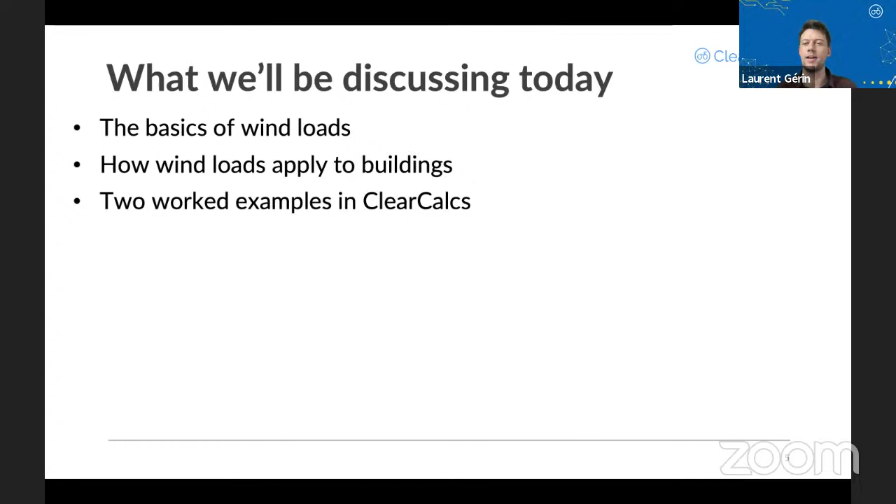And then the biggest thing, obviously, with wind load is wind speed. You just have to go outside during a storm to know that the faster the wind, the stronger it's going to feel, and buildings feel the same thing. But there are a few other things that we need to consider when we're talking about wind loads, so we're going to be talking about those today.

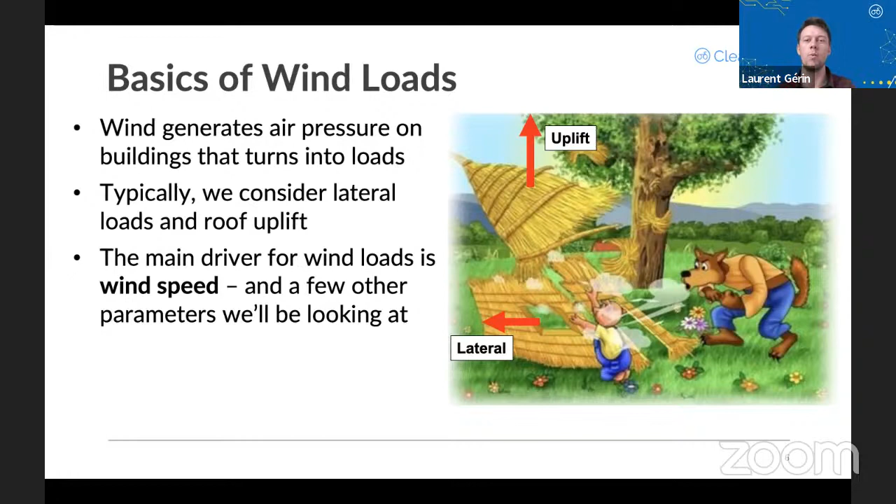So we are talking about wind in the United States. ASCE 7 is the law of the land here almost everywhere. If you're working with another wind code in your jurisdiction, we'd love to hear about it. But as far as I know, mostly everywhere is ASCE 7. That's where you'll find your formulas, your design values for your wind speed, things like that. So definitely a must-have when you're designing for wind. One thing to keep in mind is your local jurisdiction or your state building code might make some amendments to it. Most common one, especially in bigger counties, the county might set a specific design wind speed that overrides the ASCE 7 maps. So definitely double check that when you're working with wind loads.

Right now, ASCE 7-16 is what's used in most states. That's what's referenced by the International Building Code 2018 and 2021. International Building Code 2024 will be switching to the 2022 version of ASCE, the latest version. And I recently learned the Florida Building Code coming out at the end of this year will also be using ASCE 7-22. And there are still a few states using the 7-10 version, which is a bit older. I believe there's Indiana, Iowa, and a few other states. So if you're working in that state, you're probably aware of this, but good to keep an eye out for these things.

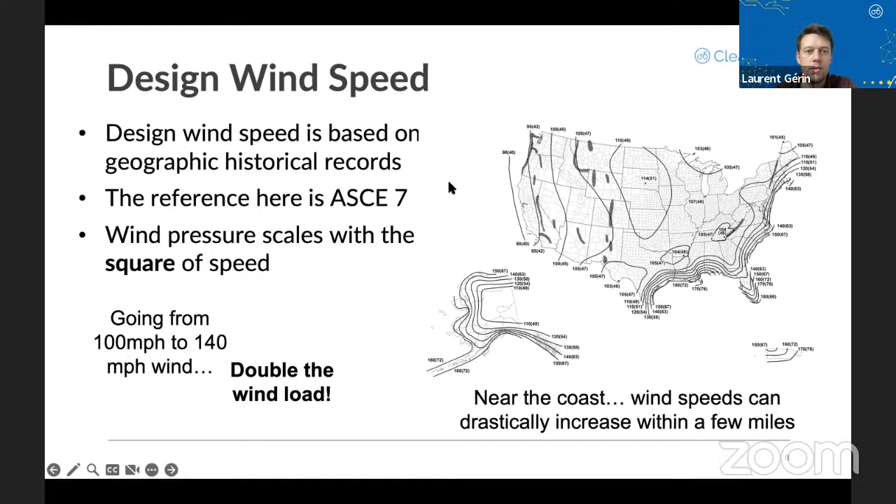So it's pretty significant. And especially if you're near the coast, say the Gulf Coast, the East Coast, even within a few miles, you might get a 10, 20, 30% difference in wind speed. So again, this is one where you might want to check with your local jurisdiction to see what wind speed, if any, they specify. Otherwise, probably better to err on the side of caution because, as I said, the gradient on wind speed here is so high. You really want to make sure you're using the right wind speed. It's got a huge impact on your design loads.

Next, we've got exposure categories. And so this might be something that you feel if you're, say, going hiking and you're in a clear area where there's no trees and it's windy, you feel it, and then you get in the forest and all of a sudden it's calmed down a lot, there's a lot less wind. That is basically this exposure category. So there's 3 categories in ASCE 7. It starts at B, ends at D. There used to be an exposure A, but that is no longer in the standard.

But exposure B is basically anything urban, suburban, where you've got trees, you've got buildings that kind of shield the wind. Exposure C is anything on land that's a field. Maybe you've got a couple trees here and there, but overall the wind is unimpeded. Again, this is kind of like the transition where you're walking in the forest. Exposure B, you're walking in the forest, not feeling any wind. Exposure C, you're out of the forest. You can still see it, but you're feeling a lot more wind. And then exposure D is generally anything where you're near a big body of water. So the Great Lakes, the oceans, something like that is where you'd be looking at exposure D.

And in general, for residential design, you're going to be looking at the worst case exposure. So you might be building at the edge of a new development where on one side you've got exposure B and on the other side you've got exposure C. You would, in general, just pick exposure C for everything. And that's the conservative option. Now, if for some reason you were finding that these loads are inappropriate or far too high, you might be able to adapt these exposure categories. And the standard does have some instructions on this. But we're not going to jump into that. Almost all the time in residential building, you're going to want to look at just the worst case scenario for exposure.

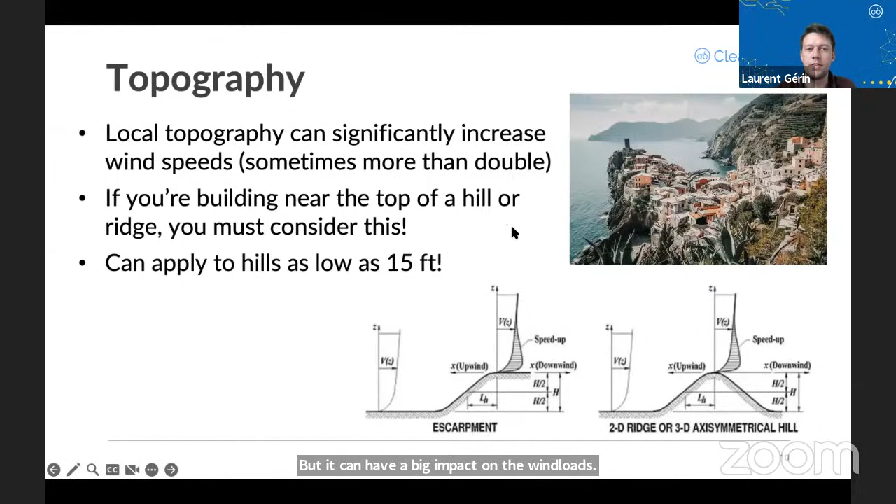And what's interesting is if you look in the standard, this can actually apply for hills that might be as low as 15 feet. So really small hills might actually have a pretty significant impact on your wind loads. And that can actually easily double your wind loads sometimes. So significant increase in your wind loads. Very easy to miss because, to be honest, the calculations are not that straightforward, but it can have a big impact on the wind loads. So I'd love to hear if this is something that you typically calculate based on your geography or your project.

Another one is elevation. So obviously, as you've probably felt if you've been in an airplane, as you increase your elevation, the air gets thinner, there's less air molecules in the air. And so the air density actually gets lower, and that means lighter wind loads. There's less air molecules hitting your building, basically.

And just for fun, I looked. So if you're in Colorado Springs, which is where Connor, my colleague here, lives, and you've probably spoken with him, you'd actually get about a 20% reduction on the wind loads compared to doing the same building at sea level. So it's a pretty significant reduction, and 20% might mean you get to go to a slightly smaller sheathing size or something like that. So something to consider. And what's cool is in ClearCalcs, if you enter your project address, we'll automatically calculate the ground elevation for you, and we'll calculate that factor for you.

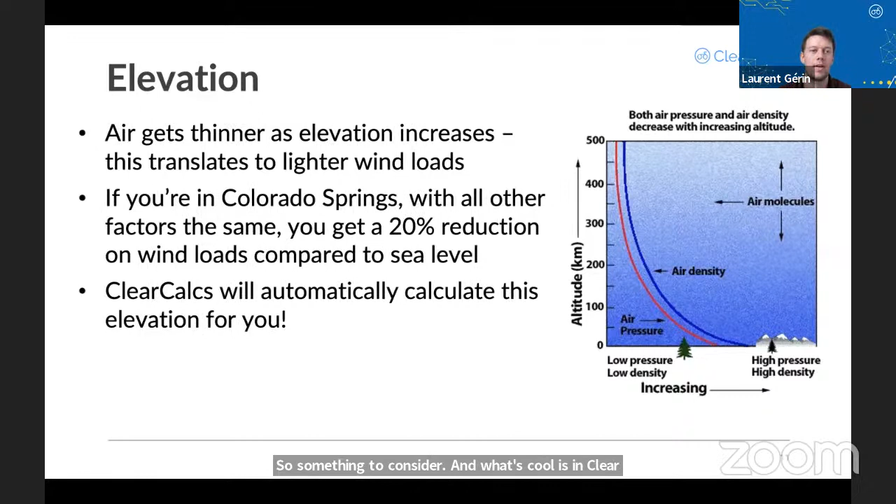On the inside is where things get a little bit more tricky. The standard kind of simplifies this a little bit, and they give us 4 different categories of buildings. So the first one is the enclosed building, and that's pretty straightforward. We're saying there's basically no major openings, and if there are openings, we are completely sure that they'll be closed and unbroken during a storm. So especially if you're near the coast, you might have some protected openings, or they might be missile resistant or something like that. So that's something that you would consider in an enclosed building.

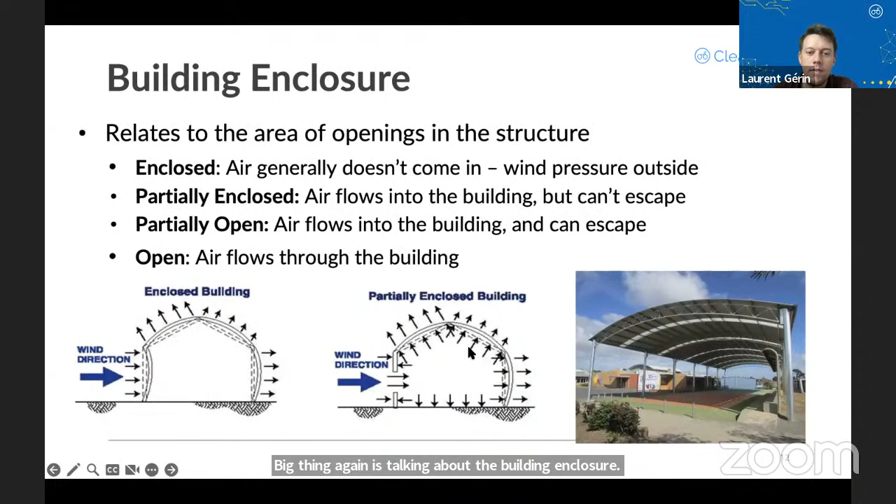If we're thinking about pressure on the inside of a building, this also has an impact with the components and cladding. If you think about your studs in a tall wall, obviously if your building is trying to blow up like a balloon, and you've also got the wind causing suction on the outside, those two things are going to add up, and it makes your stud bend even more. An important thing here is that the components and cladding loads get much lower as your tributary area increases.

So what does that mean? Basically, we talked about turbulence and how it's very local effects. If we compare, say, a single shingle, the turbulence only needs to happen over that single shingle for it to fly off. Versus if you're thinking about an entire rafter, you would need a lot more turbulence, a worst case scenario over that entire length of that rafter, all happening at the same time. So basically you average out this turbulence over the entire area of the rafter, and it ends up being a much lower value than if you're only looking at a specific shingle.

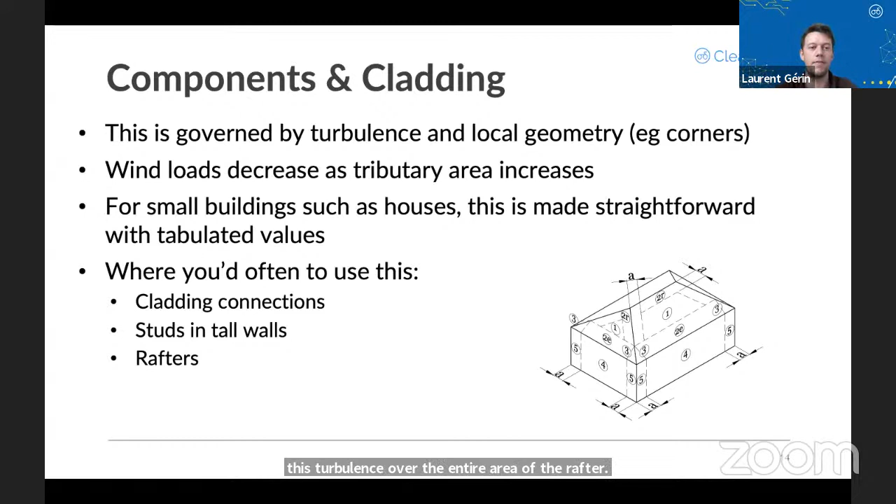And then the other type of wind load that we spoke about was main wind force resisting system loads, or as we tend to call it here at ClearCalcs, the MWFRS loads, not a type of dinosaur. These loads are typically applied over the entire area of the building. So this is where you're thinking about, is my building going to overturn? Is my building going to shear? Or are my foundations going to slide? So in this case, we don't care about the local turbulence much. We don't care about that single shingle flying off. We care about the entire building standing up in a big storm.

I'm sure you've seen some pictures of the skyscrapers in New York where they've got the crazy dampers for vibrations. That's where you'd be thinking about the main wind force loads. And these ones would be a lot more complicated. You're thinking about the vibration in the building, natural frequencies. Luckily, if we're dealing with low buildings such as residential housing, and if they're rigid enough, which the standard gives a definition for, but most houses would meet, things are a lot simpler. We basically just get a factor of 0.85 we apply to our wind loads, and that's it. We've accounted for the vibrations in there.

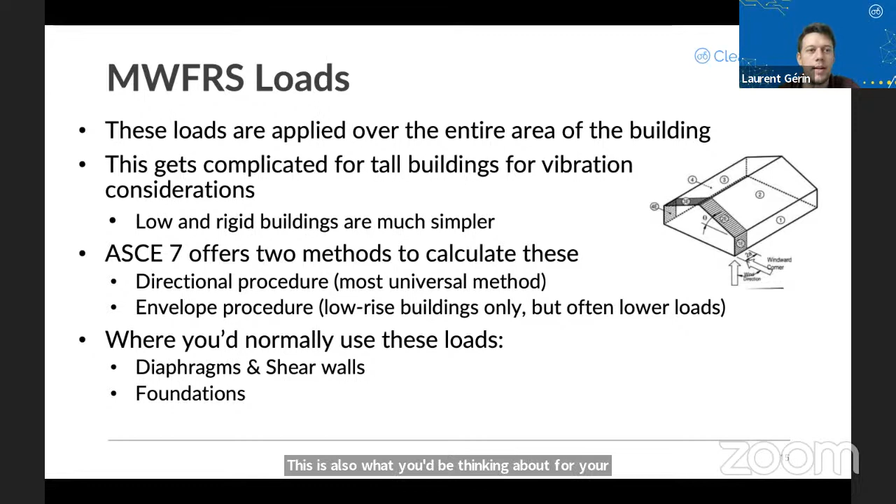And one important distinction here, and we've heard that question before, so I wanted to make sure to speak about it here. Wind loads in ASCE 7 are calculated at the LRFD level, so the load resistance factor design. If you're working in ASD, which is typically what we'll be doing in residential design, these loads are multiplied by 0.6. What's really important here when you're working, say, in ClearCalcs, and I believe most other software, you will actually enter the wind loads at the LRFD level.

So you want to be very careful about that. Obviously, if you're multiplying your loads by 0.6 before you put them in ClearCalcs, they're going to get multiplied by 0.6 again. So you'll be drastically underestimating your wind load. So definitely something that you want to be mindful of.

Okay, so now we are going to look at a design example in ClearCalcs. We're going to focus a lot more, obviously, on calculating the wind loads, but figured it's nice to see it in application. And so what we're going to be doing is design a stud wall spanning 2 floors. I put an example picture here. And we'll be designing this in Lincoln, Nebraska. It's a gable roof, and we've got different design parameters here. And so I'm going to switch into ClearCalcs now, and we're going to look at designing this.

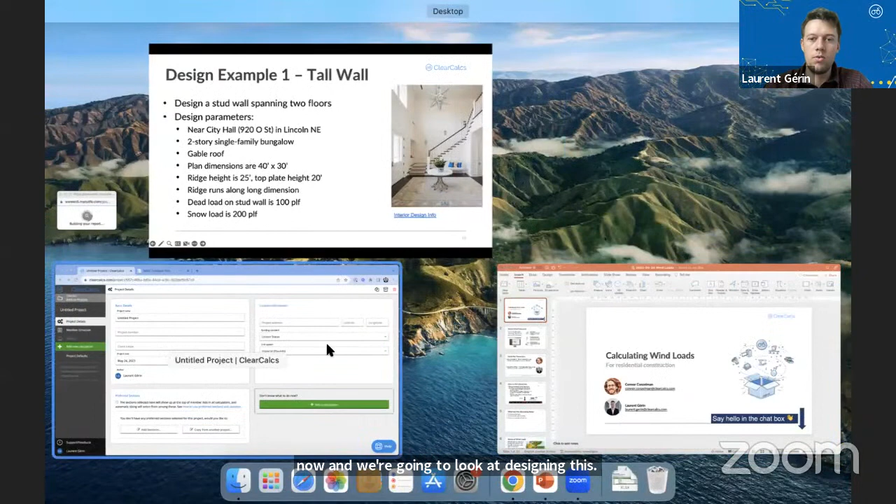And what I'll do actually is I'll do this. If I go to ClearCalcs, can you see my ClearCalcs? Yep, we gotcha. Awesome, great.

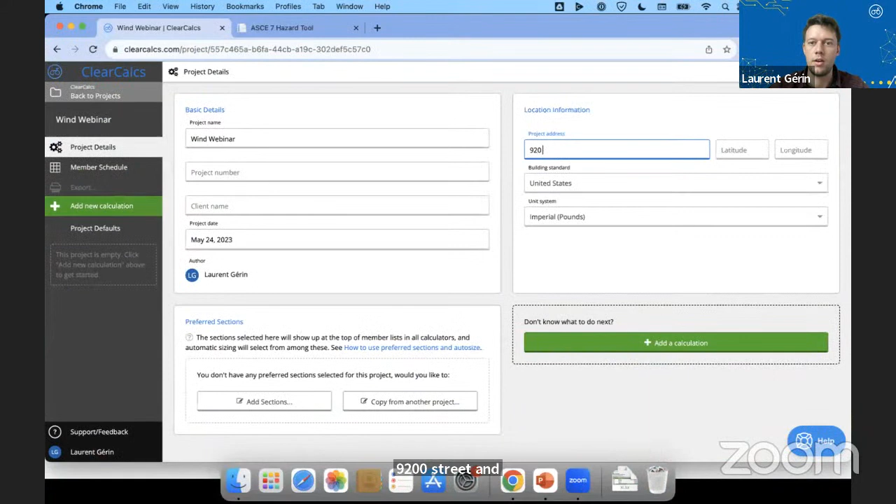So I'm just gonna say wind webinar and project address. I apologize, I should have copied it. If I go back to the presentation, here we'll see it's 920 O Street in Lincoln, Nebraska, near City Hall. So I can come back here, 920 O Street, Lincoln, Nebraska. And I can see here I'm in Lincoln, and I've got my little satellite picture. And already I'm looking at this, and I can start thinking about, ooh, what exposure category is this going to be? This looks pretty urban.

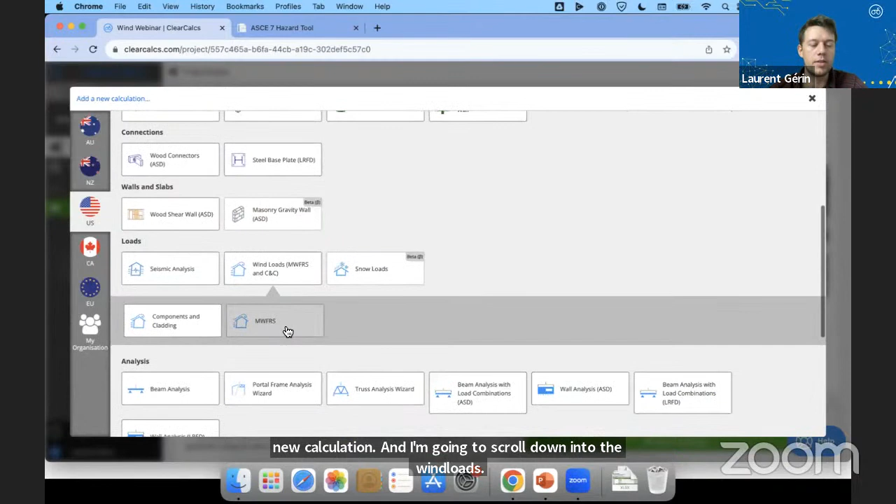So I'm going to create now a new calculation, and I'm going to scroll down into the wind loads calculator. And let's start with the components and cladding. We discussed that if we're doing a stud wall, we're looking at the individual stud as a component. We want to make sure it's strong enough. So we'll typically be dealing with components and cladding loads. So I'm going to create this calculation here. And first thing I see, type of calculation, components and cladding. So we're good. First question, basic wind speed.

So this is something that we're working on soon. Ideally, we'll be able to just calculate this for you. You'll just put in your address, we'll put it there. But it's not quite something we've got right now. So in the meantime, what we recommend is this ASCE 7 hazard tool. And you can visit it at asce7hazardtool.online. And it's basically got a map of the United States with different wind speeds. This is basically the same map that's in ASCE 7, except in a digital format.

So I already entered this, but say we want to enter it again, Lincoln, Nebraska, I'm going to pick ASCE 7-16. See, there's also the 2010 and 2022 editions, but we'll keep it to 16. Risk category: this is typically for a residential building, risk category 2, where 1 would be for very low occupancy buildings, and 3 and 4 for higher importance buildings. We don't need to select the soil class because that's for seismic. We're only going to look at wind loads for now. So I'm going to do view results.

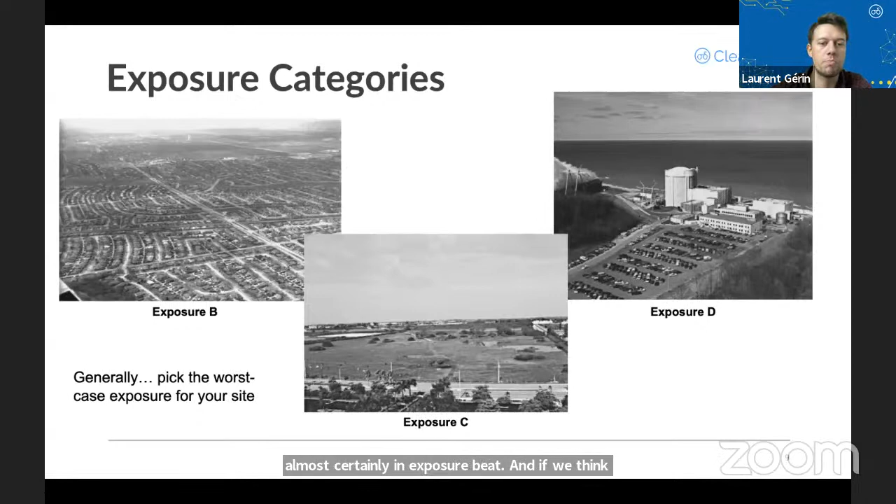If we're in the middle of Lincoln, Nebraska, we're definitely not by the water like this. We're not in the middle of a field. Therefore, we're almost certainly in exposure B. And if we think about the entire lifetime of a building or a house, it's pretty reasonable to expect that it would stay in exposure B over its entire design life.

So I'm going to go back to ClearCalcs now, and I'm going to change this exposure category to B, urban wooded areas with many obstructions. And already you can see the table here with the wind pressures just went down, but we'll get back to that. Okay, next we're going to need our building properties. So we know it's a gable roof.

And if I come back to the example, right here, I know my plan dimensions are 40 feet by 30 feet, and the ridge runs along the long dimension. So perpendicular to the ridge is 30 feet, and my length is 40 feet. And that's perpendicular to the ridge or parallel to the ridge. I'm going to enter my rooftop height, in this case, at 25 feet.

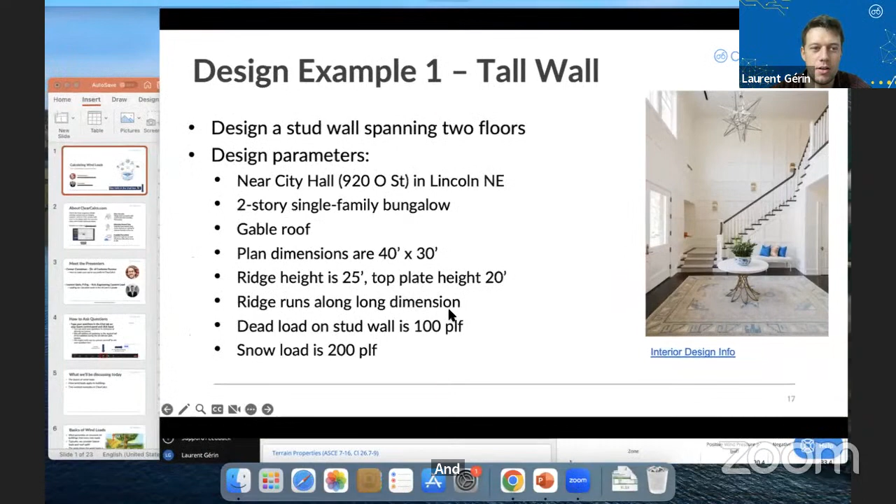Let me just open this up again. I can see here it's 25 feet. And top plate height is 20 feet. And this is my bad. When I wrote this, I should have mentioned rather the roof pitch. It's going to be 4 and 12. So if I look here, my roof eave height now is at 20 feet. And my roof pitch is at 4 and 12.

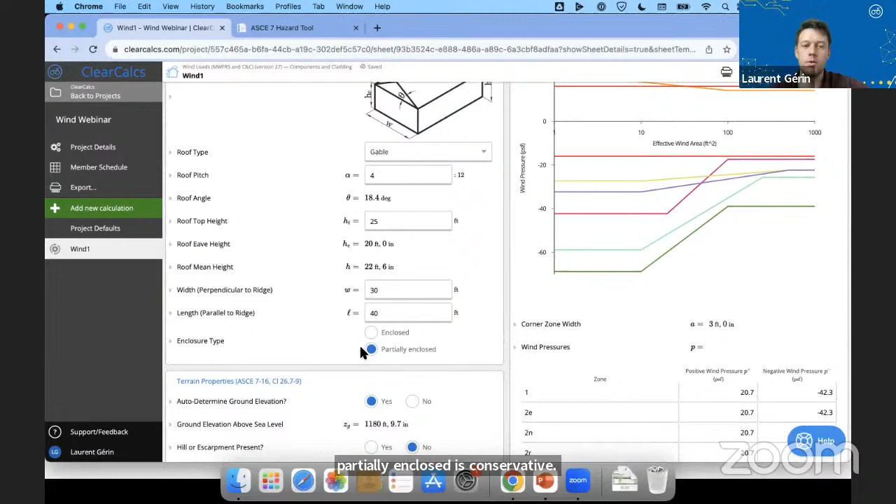And lastly, for my enclosure type, this is what we talked about. Enclosed is better in terms of lowering your wind loads. Partially enclosed is conservative. And for most residential buildings, when you've got windows, you've got doors, you've got patio doors, garage doors, you're almost certainly going to want to keep this as partially enclosed.

And I can see here in terms of terrain properties, because I entered the address for Lincoln, it's automatically determined my ground elevation at 1,180 feet. If I wanted to, I could set this to no, and I could just set this to 0 feet and call it a day. And this is always conservative to use 0 feet. In this case, I'll leave it at the auto determine.

Once that's done, we can see here we've got our internal pressure coefficient, 0.55. So that relates to our enclosure type here. So if I made this enclosed, you could see it's 0.18. So from 0.18 to 0.55, that's a big increase in wind pressures. And next we can see the different coefficients. We really don't need to linger on this, but this basically just takes the values from the ASCE 7 tables and puts them into ClearCalcs.

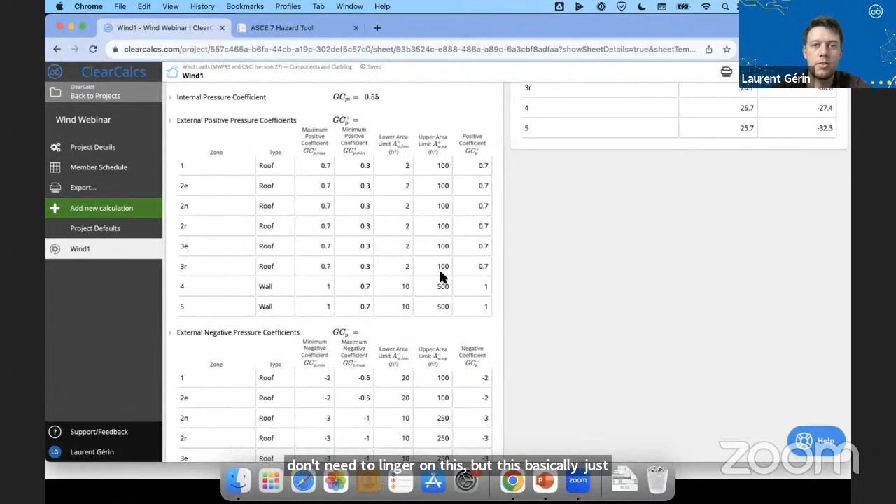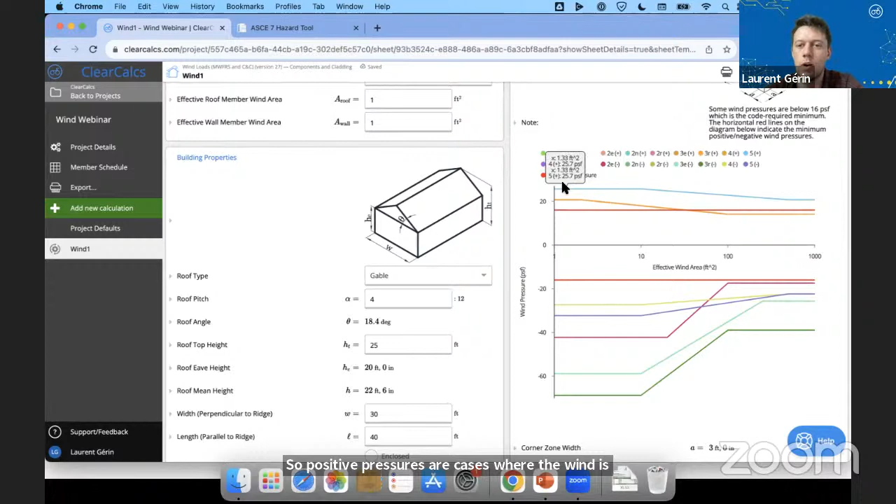Where things get really interesting is looking at this table here. So I mentioned when we're talking about components and cladding loads, that these vary based on tributary area. And so you'll see that there's quite a few lines here. So positive pressures are cases where the wind is pushing the building. So it's pushing into the wall, and you can see these pressures are typically lower. At the highest is on the walls, where we've got 25.7 pounds per square foot. And then we can see that as the wall area increases, this goes down all the way to 20.7 pounds per square foot. So a good chunk less.

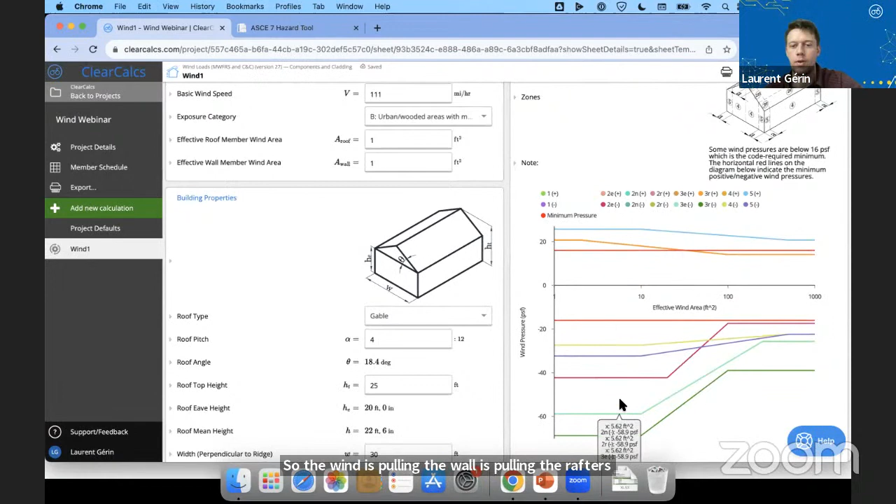Similarly, we've got on the negative side, that's when there's suction. So the wind is pulling the wall, is pulling the rafters, is trying to do uplift on the roof. That's those negative wind pressures. And obviously these get a lot lower. And again, these vary based on the area. So the two horizontal red lines here, they're the minimum pressures by the code. So we're going to ignore those.

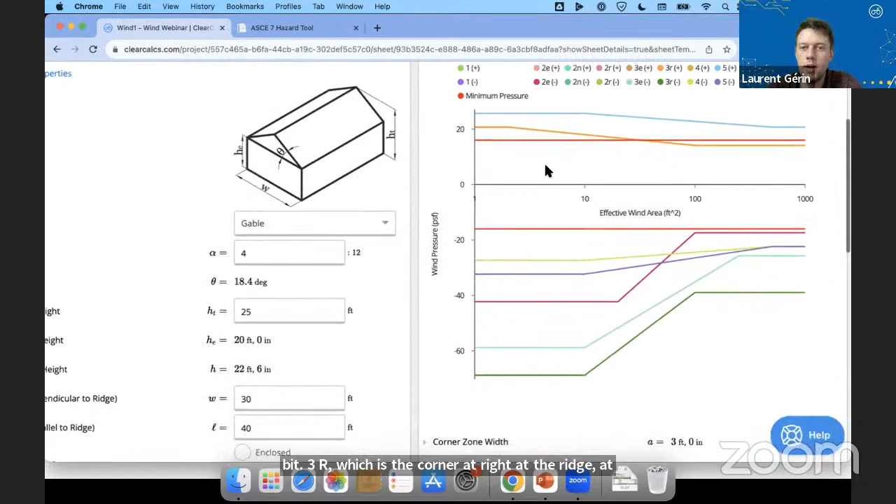But if we look at, say, zone, I'm going to zoom in a little bit, 3R, which is the corner right at the ridge, at the top of the ridge, at the edge of the gable end. I can come here, and it's the dark green area. So if I look 3R, up until 10 square feet of wind area, I'm at almost minus 70 pounds per square foot of uplift. And then as soon as I hit 100 square foot, I'm at minus 39. So it almost doubles the load when we're looking at small components.

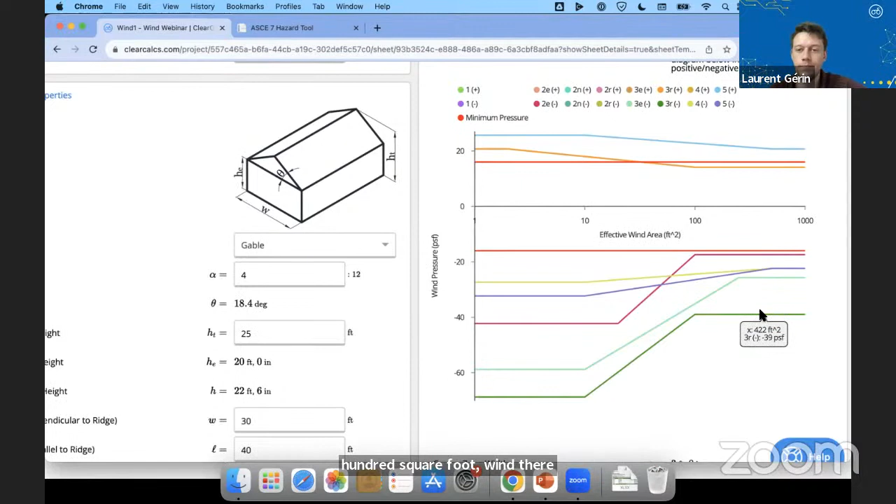So again, this 70 pounds per square foot is something that a shingle might feel, whereas the 39 pounds per square foot, at 100 square foot wind area, that might be what the ridge beam would feel. So once we've got this, obviously it's not quite practical to just read it off the table. So we've got these wind pressures tabulated here, and these depend on the wind areas that we enter here.

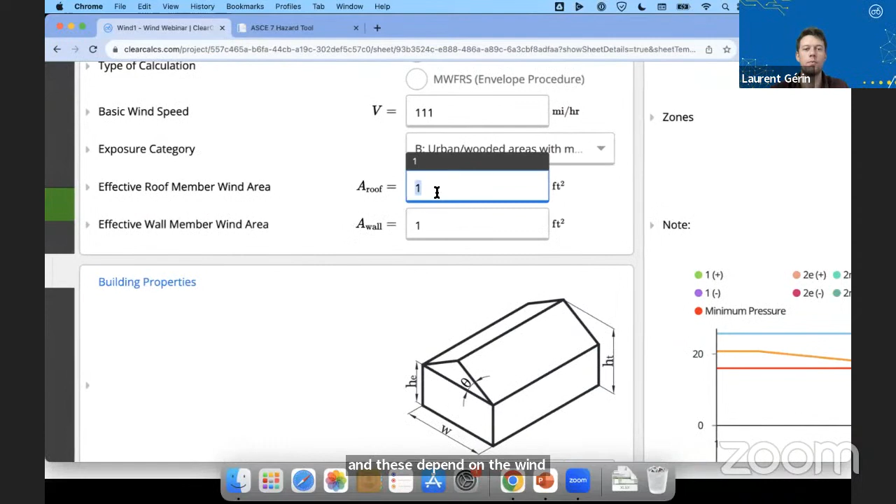So we'll leave the roof because we're only looking at stud walls right now. So for a stud wall, we talked about a 20-foot tall stud wall, and we'll assume we're at 16-inch spacing. So I can just type in 16 inches times 20 feet, and I can see my wind area is 26.7 square feet. So if I go to my table here, I've got all these different values you can see.

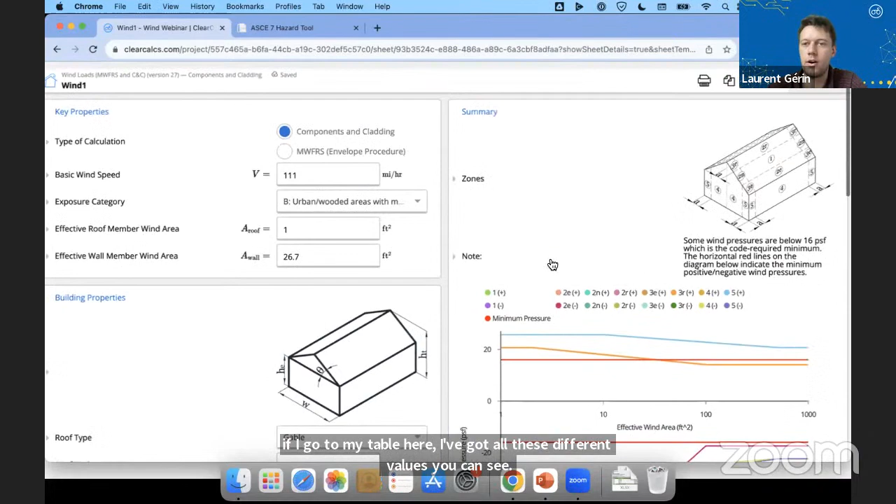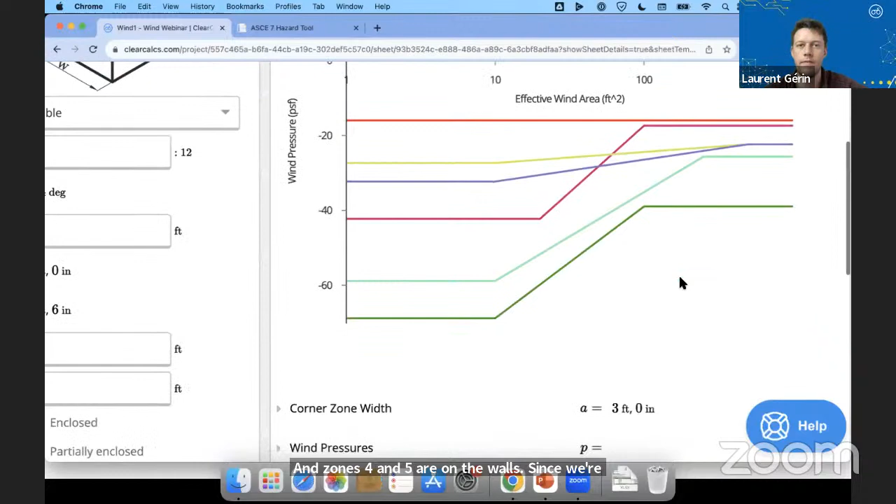So zones 1, 2, 3, if I look on the diagram, are all on the roof, and zones 4 and 5 are on the walls. Since we're designing stud walls, we're only going to look at zones 4 and 5. And this is where I look. So 24.4 pounds per square foot, positive wind pressure. So the wind is pushing with 24.4 pounds per square foot on the wall.

And negative wind pressure, I can see zone 4 minus 26.1. So the suction's a little higher than the positive pressure. And then zone 5 is even higher at almost 30 pounds per square foot. So if I go back to my diagram, I can see zone 5 is in the corners. So it makes sense that we'd expect slightly higher wind loads here.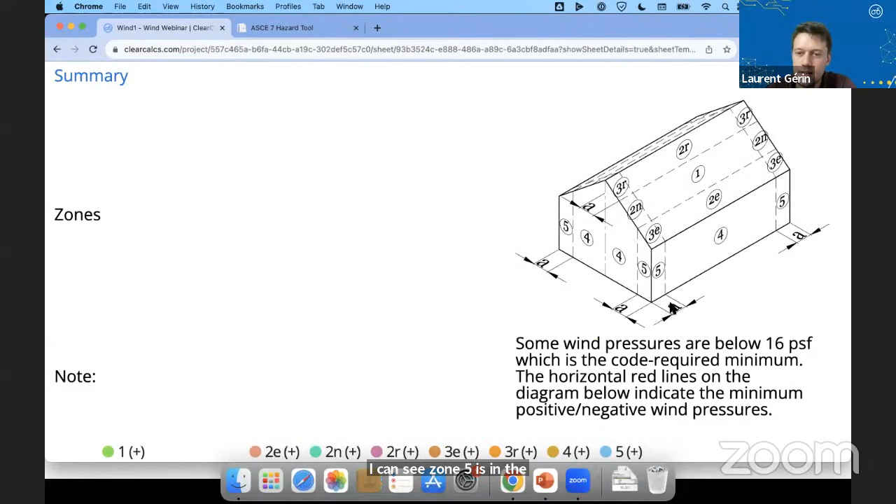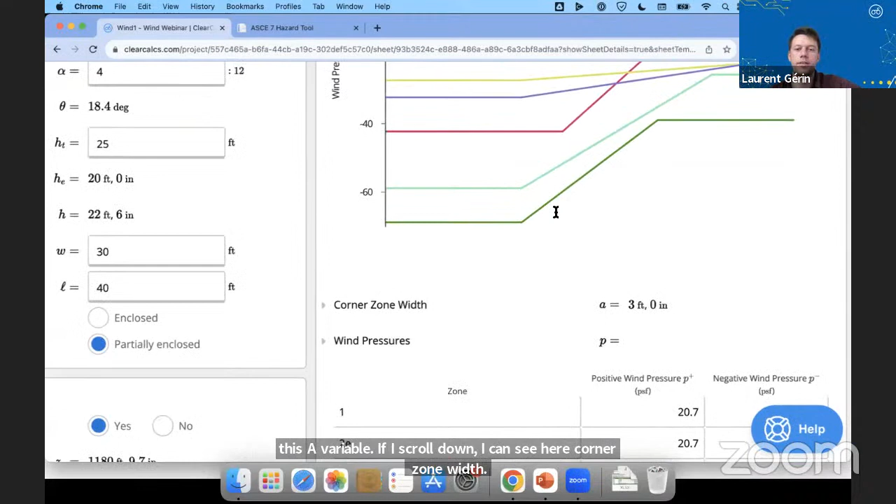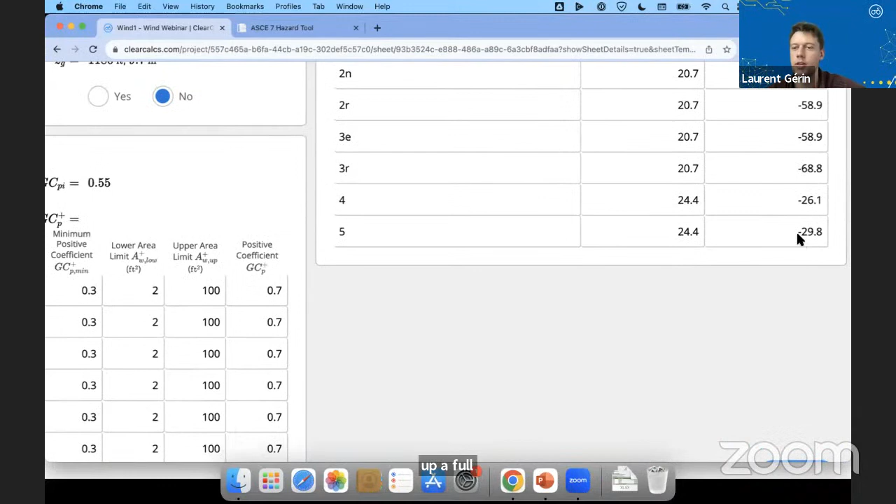And I can see that these corner zones are defined by this A variable. If I scroll down, I can see it here. Corner zone width, 3 feet. So I know that if I've got 16-inch spacing, I'm going to have at least one stud that's basically taking up a full wind pressure on zone 5. And so conservatively, I'm just going to take this minus 29.8 PSF. That's basically all of this to get that minus 29.8 PSF value on my stud wall.

So now let's just quickly look at how I might put that into a calculation on ClearCalcs. So I'm going to create a new calculation. And I'm going to create a wood column. And we'll do the ASD wood column. And I'm going to go to the right and do an exterior stud wall. Okay, we'll let this load, and I'm going to close this. So right now I've got a 2x6 number 2 Douglas fir.

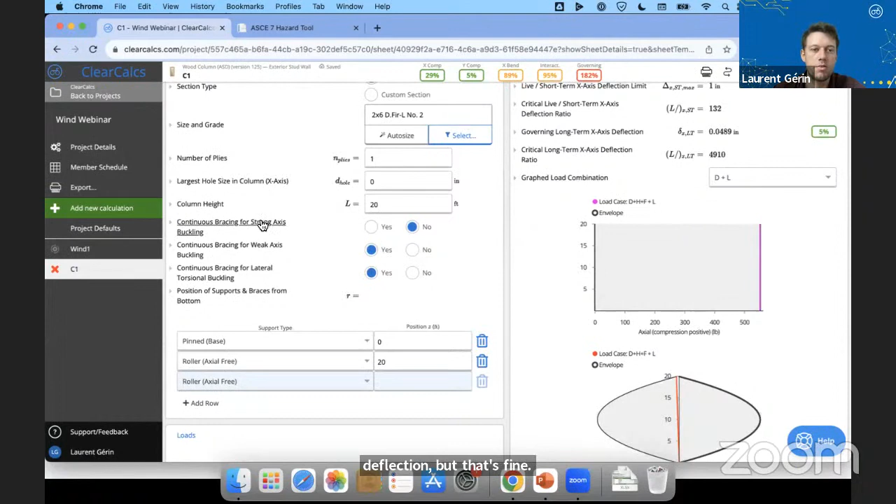That's fine. So first thing that we'll change is the column height, or the stud wall height, and we'll put in 20 feet. And already we can see it's failing now because of the deflection, but that's fine. And everything else will stay the same. It's not braced in the strong axis for buckling, but for weak axis, the sheathing presumably braces it against buckling.

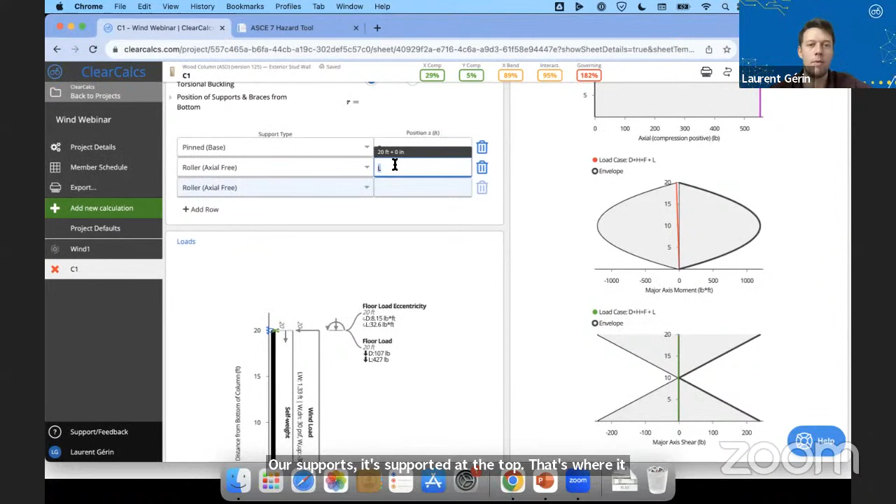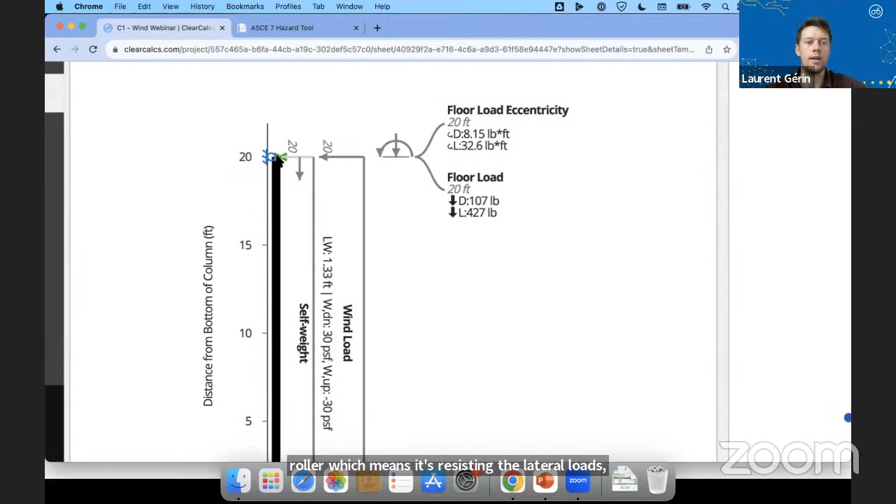Our supports, it's supported at the top. That's where it lays on, and then at the bottom, that's where it lays on the ground. And at the top, we've got just a 20-foot roller, which means it's resisting the lateral loads. They might be going into a diaphragm or a wind beam, but obviously it's not taking vertical loads since those are all going to the ground. So I'm going to keep scrolling now. And I can see I've got my 16-inch spacing on my studs. That's what we used in our wind calculation as well.

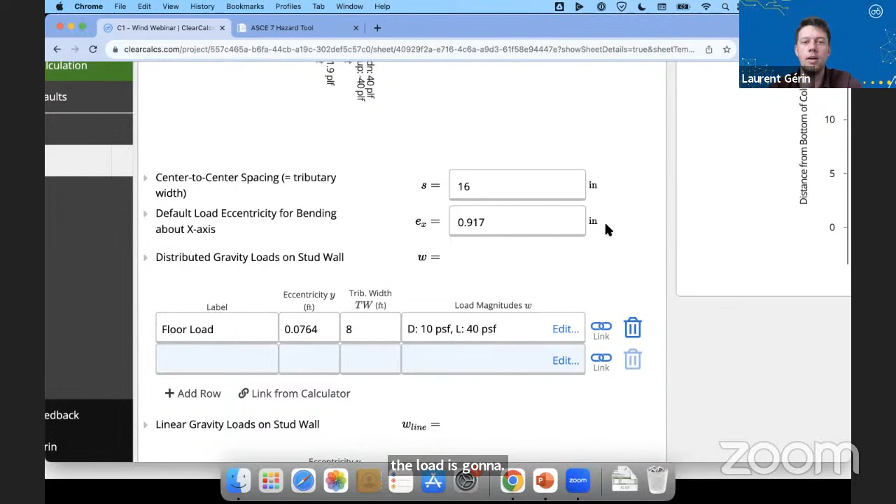Then we ask for the default load eccentricity. So by default, we'll put in 1/6 of the depth of the stud. And the reason we do that is literally just so that we can be conservative, because we don't know if the load's going to fall right in the middle of the stud. So it's kind of a conservative assumption. We don't have to put this in. The code doesn't necessarily require it, but it's generally good practice. So we're going to leave this as is.

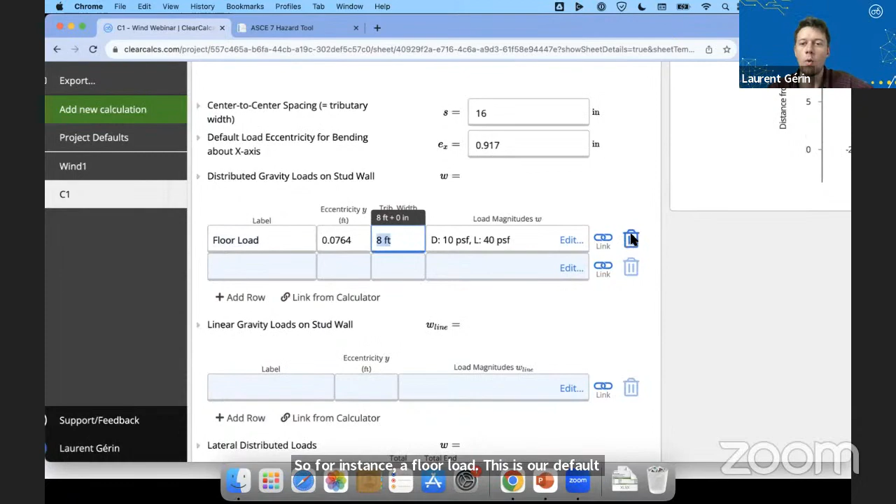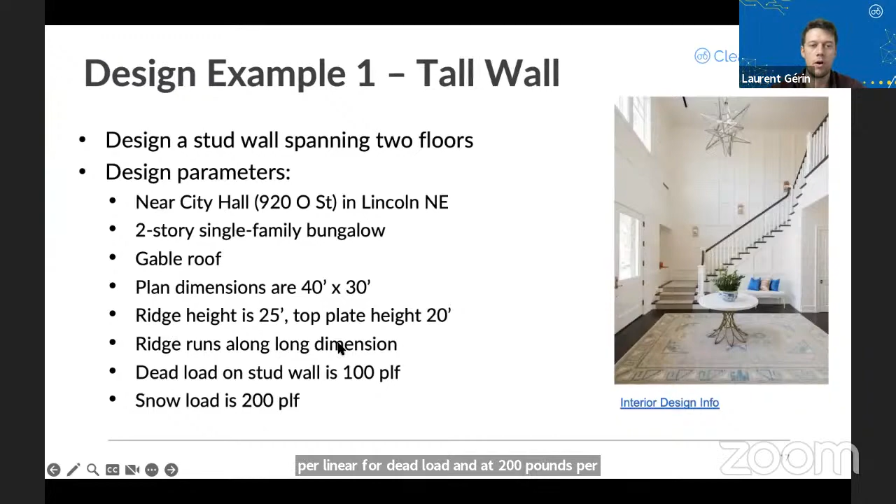Now, this is where we could enter the distributed gravity loads. So for instance, a floor load, this is our default values. We've got 8-foot tributary width and then 10, 40 dead, live loads. We're going to delete this for now, because if I look at my example here, I can see I've got 100 pounds per linear foot dead load and a 200 pounds per linear foot snow load. So I'm going to come back here and just enter these as loads. So I'm going to enter this as roof load.

I can see my eccentricity is the same. This one's in feet and this one's in inches, but it's the same value if you look. 0.917 inches is 0.0764 feet. So that is entered by default. I could make this 0 if I wanted to, but no need right now. And I'm going to enter my loads now. So I said dead load 100 pounds per linear foot, and snow load, 200 pounds per linear foot.

Just want to make sure that's what it was. Yeah, 100 and 200. Okay, and so I'm going to close this. And the last thing to do, obviously, is to add our wind loads. So you can see by default, we've got these wind loads. You can see the spacing, it just matches. It's 1 foot plus 4 inches, so 16 inches.

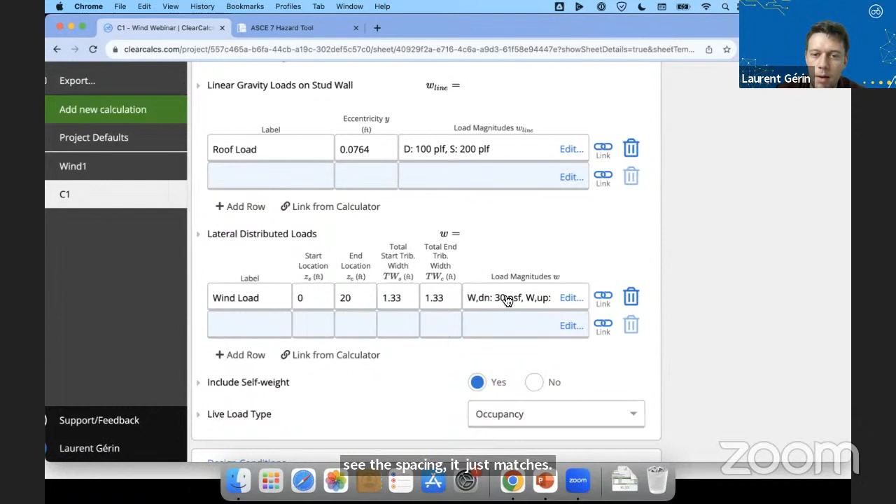And I'm going to open this load magnitude. And right now you'll see we've got wind down or lateral and wind up loads. What I'll typically recommend, unless you're doing something a bit more advanced, for walls where you're looking at lateral loads specifically, you can generally remove this wind up parameter. Or if you want to be safe, you can enter both values with a negative sign on the wind up.

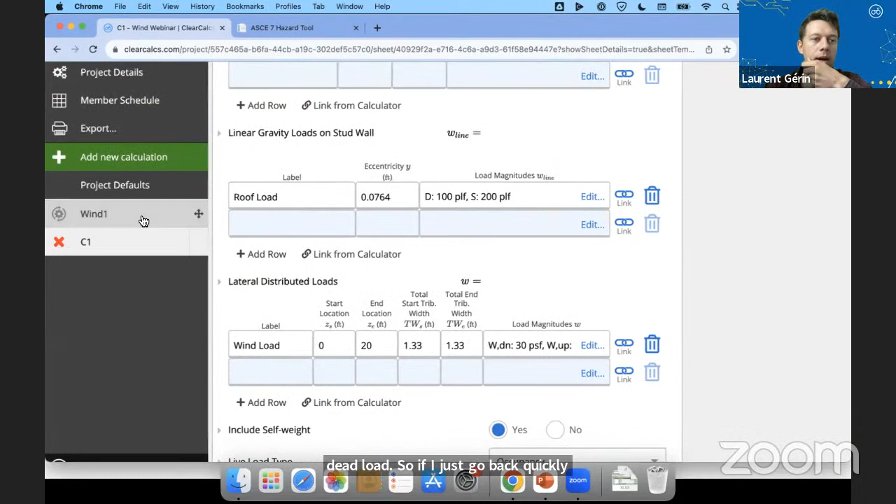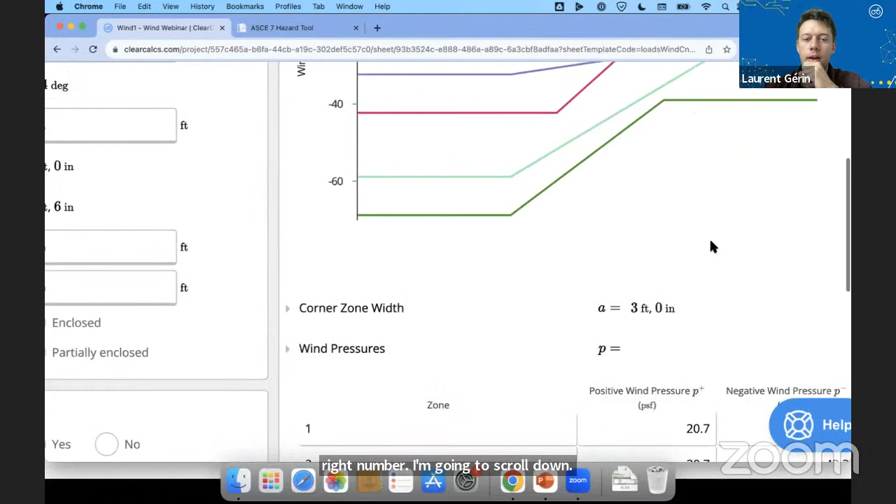What it does, the wind up, is it gets used with 0.6 times the dead load and 0.6 times the wind load, whereas the wind down and lateral gets used with the full dead load. So if I just go back quickly to my wind load, let's make sure we're using the right number. I'm going to scroll down. Again, we're looking at zone 5 on the corner here. If I scroll down, I can see my worst case, zones 4 and 5, is 29.8 pounds per square foot.

So I'm going to go back now to my column. And I'm going to enter 29.8. And if you see this project default thing, by the way, this might be a case where you could enter your own wind loads directly in the project defaults, and it would just use those by default when you create these stud calculations. We're not going to use those right now.

We've run a webinar before on using project defaults, and I encourage you to take a look deeply into it. What I'll say is these project defaults, we're actually looking at ways to make them a bit better. So if you've got any suggestions, or if you want to share how you're typically using our project defaults, or if you're not using them, or if you tried using them, we'd love to hear your thoughts here.

But anyways, all that to say, I'm going to put in my 29.8 pounds per square foot. And on the wind up, I'm going to also enter minus 29.8. Again, this one is typically where you would enter your lateral loads, the wind down or lateral. The wind up, we just enter it to be safe, but you don't necessarily need to add it, but we'll add it in this case.

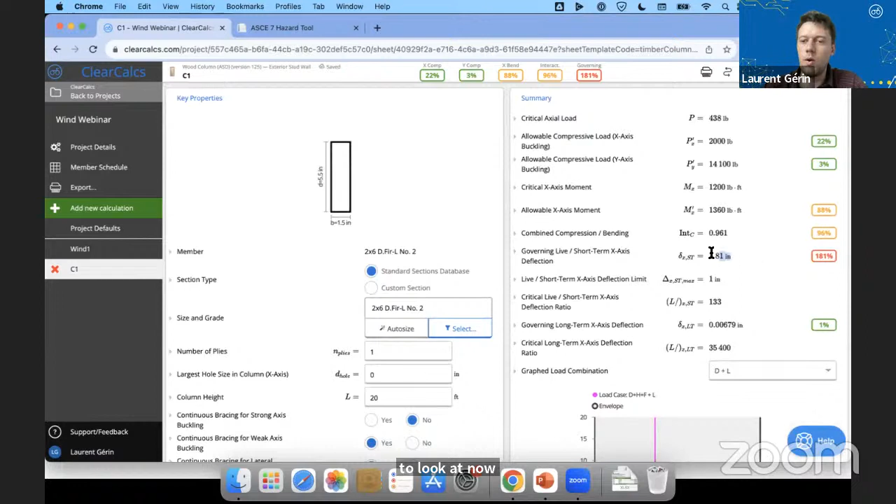And with that, I've got my design conditions, repeating member, dry conditions, temperature less than 100, which makes sense for Nebraska. It's not incised, etc. So we're good here. All that we have to look at now is what's governing. Right now, what's controlling our design is the deflection. In terms of interaction, we're good. We're at 96% utilization, but our deflection, likely from the wind, is getting us in trouble.

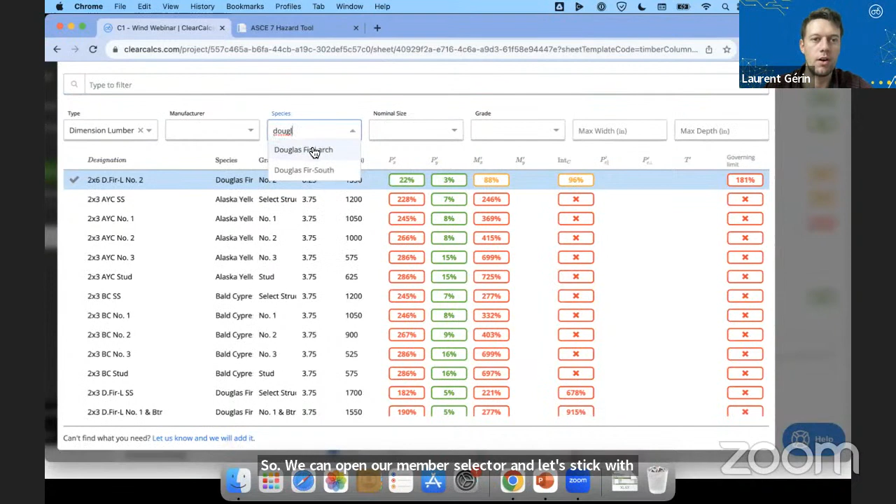So we can open our member selector, and let's stick with Douglas fir. So I'm going to type in Douglas fir in the filter here. And say if I wanted to use number 1 grade, I can see 2x3, 2x4, 2x6; 2x6 passes for everything except for governing limit. In this case, we know that's deflection, but a 2x8 seems to pass for everything.

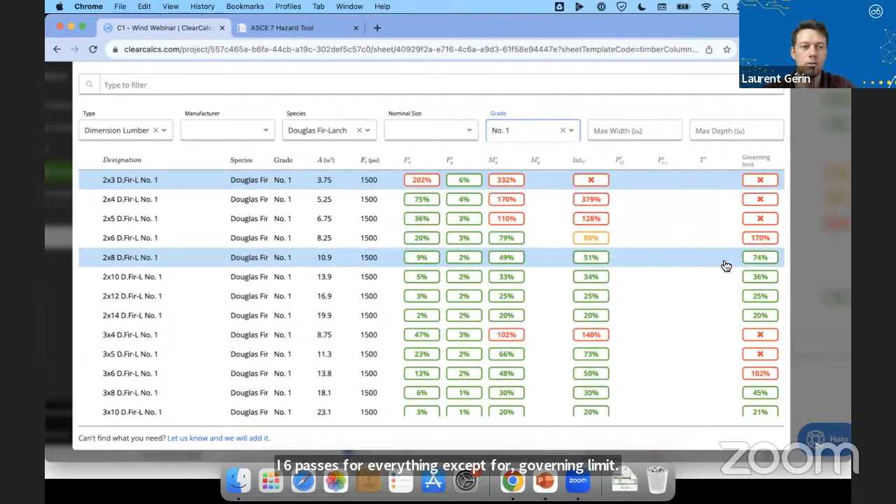So if I select a 2x8, I can now see everything passes. I can see it's being governed by the deflection. In this case, it's 0.742 inches over 20 feet. So we pass with our 1 inch deflection limit. So with that, we've designed our exterior stud wall to resist the components and cladding loads. So again, we started by creating a components and cladding.

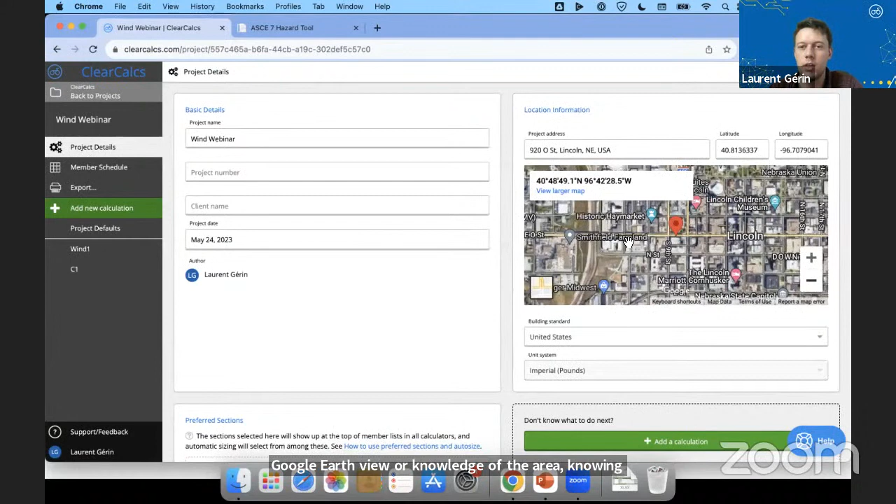We went to the ASCE7 tool to find the wind speed to use. We looked at the exposure category based on the Google Earth view or knowledge of the area, knowing that this is an urban area, therefore it's going to be shielded from the wind. We calculated our effective wall member area based on the span of the tall wall studs and their spacing. We entered obviously our roof geometry.

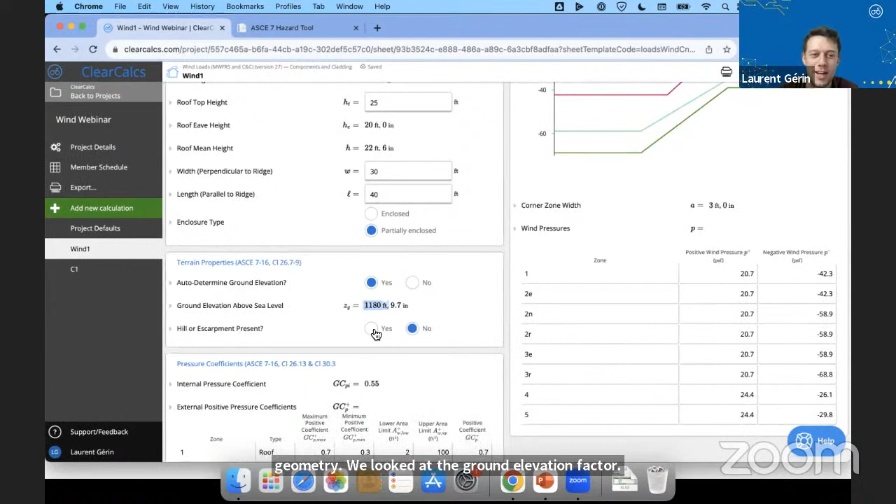We looked at the ground elevation factor. And obviously being in Nebraska, beautiful state, but not a whole lot of hills present, so we didn't have to consider that in this case. So that's basically it for our first example. Maybe before we jump into the second one, if you have any questions about this one, now might be a good time so we can go over it right now.

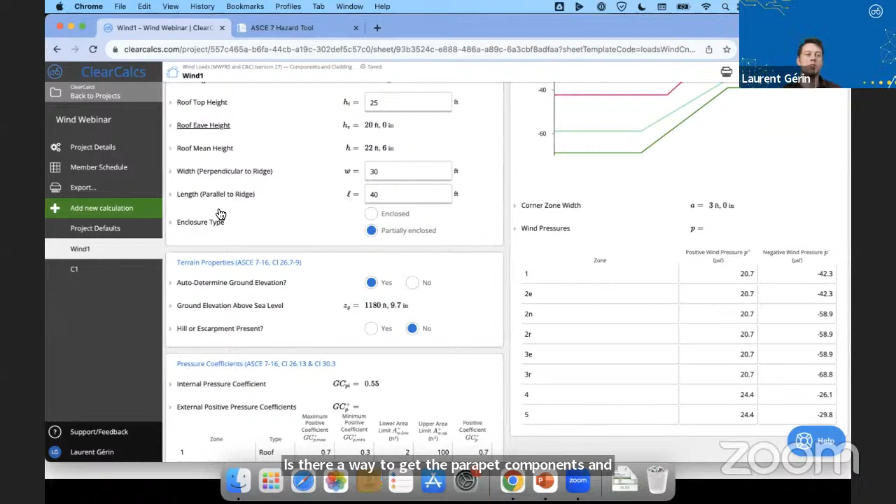Yeah, thanks, Laurent. We had a few questions come in from Andrew. In this example, we had a gable roof, but he mentioned if we instead had a building with a flat roof and a parapet, is there a way to get the parapet components and cladding in ClearCalcs currently? Great question, Andrew, and thank you for bringing it up. That's actually on our to-do list. We don't currently support parapets, because we were mostly focused on small residential buildings where you wouldn't necessarily have a parapet.

Okay, so yes, Andrew, great question there. Like Laurent mentioned, in the past we were 100% focused on the residential, which is why we didn't have it. But now the engineering team is focusing not only on residential, but also on commercial and light commercial. So that will be something that'll be coming.

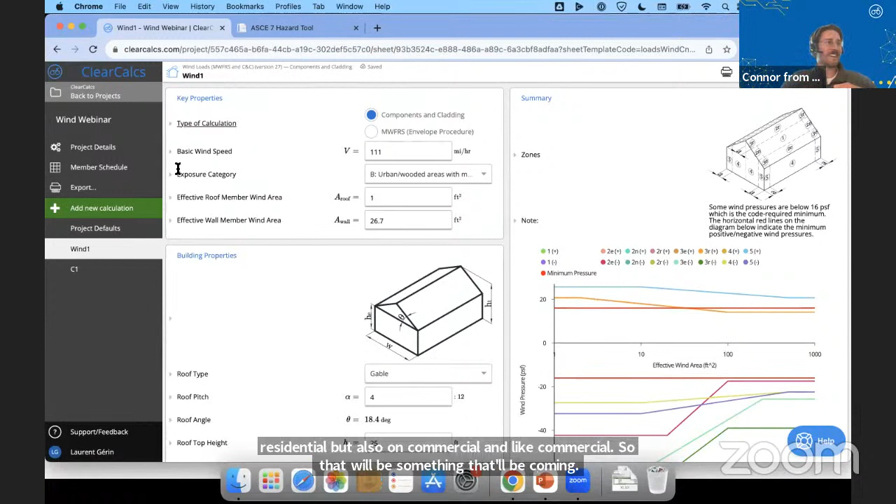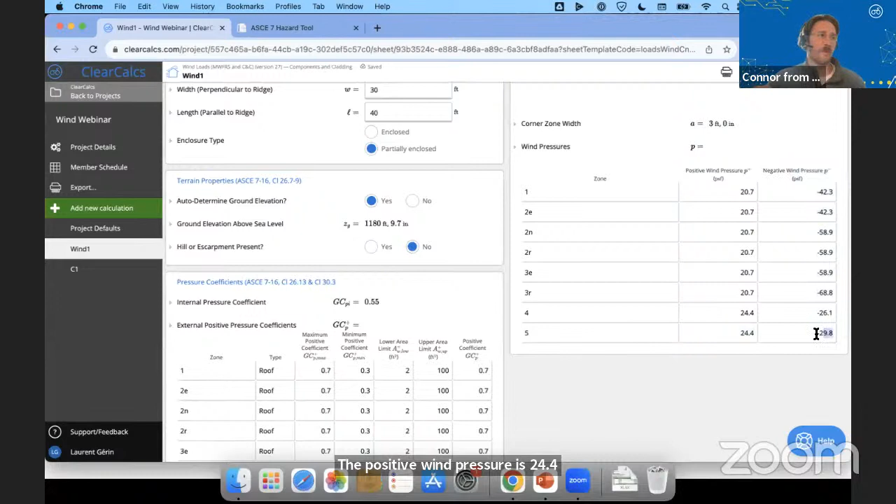And then next, Andrew had another question here. So when you were going from the components and cladding into your column calculator, if you can go back and scroll a bit down into the outputs in your wind, in zone 5, the positive wind pressure is 24.4, the negative wind pressure is 29.8. So if you put the positive 24.4, does that mean the negative 29 is not used in the snow and dead load combination, or are both checked and then the worst case used?

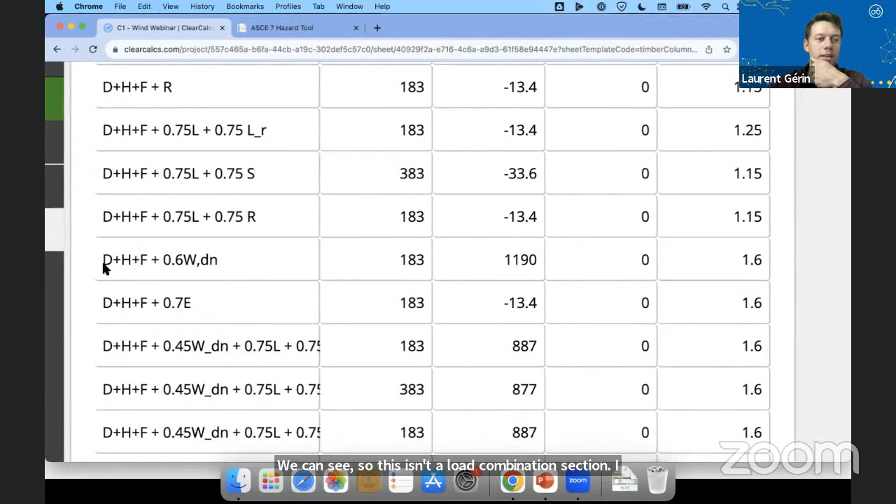Okay. So this is where it gets a little bit tricky. What I would suggest is we just take a look at the load combinations themselves, and hopefully that might enlighten us a little bit. If I open the load combinations here, I've got a load combination. This is to match the code, but it's basically dead load plus 0.6 times wind down or lateral. If I look then at my wind up, I've got the 0.6 dead plus 0.6 wind up.

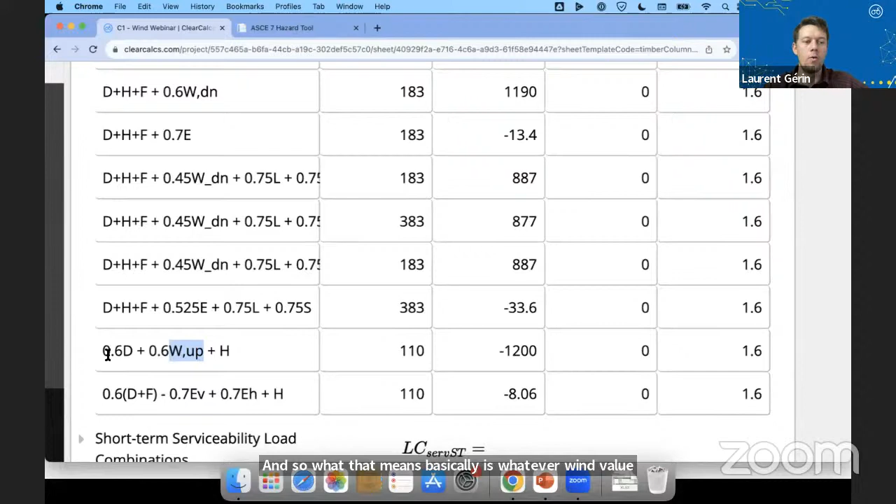And so what that means basically is whatever wind value you enter in the wind up category will get combined with the 0.6 dead, and anything you enter in the wind down category will get combined with the full dead load. And then when we're talking about combined with the live load, the snow load, etc., that's also going to be the wind down that gets considered.

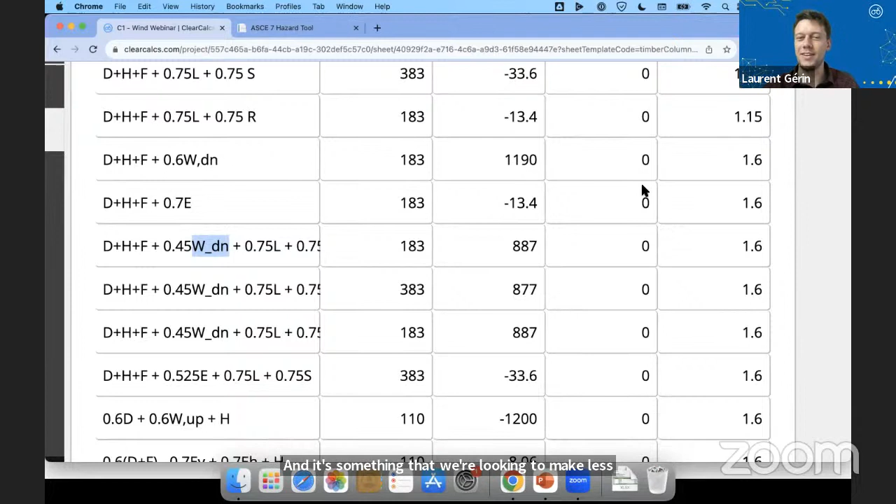I hope that clears things up, Andrew. I'll be completely honest, this might be one of our more confusing aspects, and it's something that we're looking to make less confusing. So if there's a way we can make this make more sense, we'd love to hear it, and we'll see what we can do for the team. Yeah, and let us know, Andrew, if that answers your question. I just clicked to unmute you if you want to expand on it a little more. Want to make sure we're getting that question answered because it is a good one.

And then, oh, looks like you were unmuted, Andrew. Any further comment on that? Maybe your mic doesn't work. All good. If for some reason you do have further questions, send it in the chat and I'll make sure to bring it up. As of now, that's all the questions, Laurent. So we could either move on to the next one or just continue along.

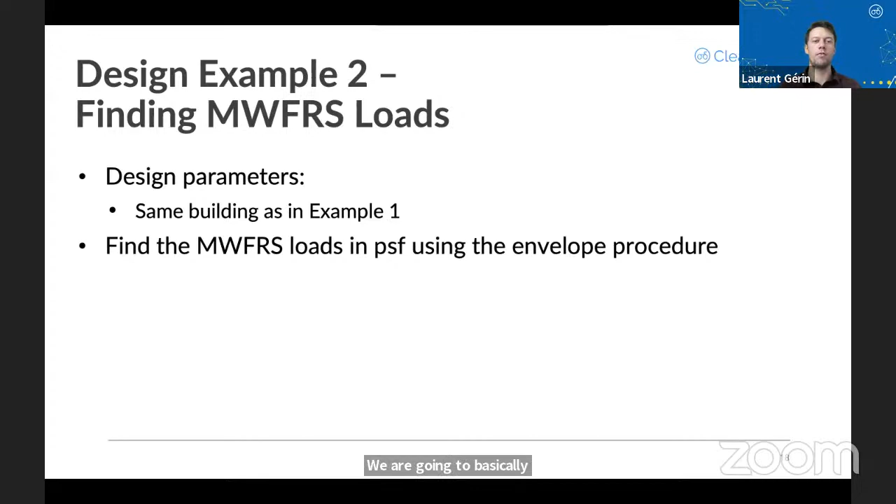Sounds good. So let's keep going. Our second example, we're going to keep it simple with the main wind force resisting system loads. We are going to look at the same building, except we're going to look at main wind force loads this time. So I'll jump straight into ClearCalcs. What I'm going to do now is go back to this wind calculator and create a copy of it. So if I come here, this button right here, duplicate.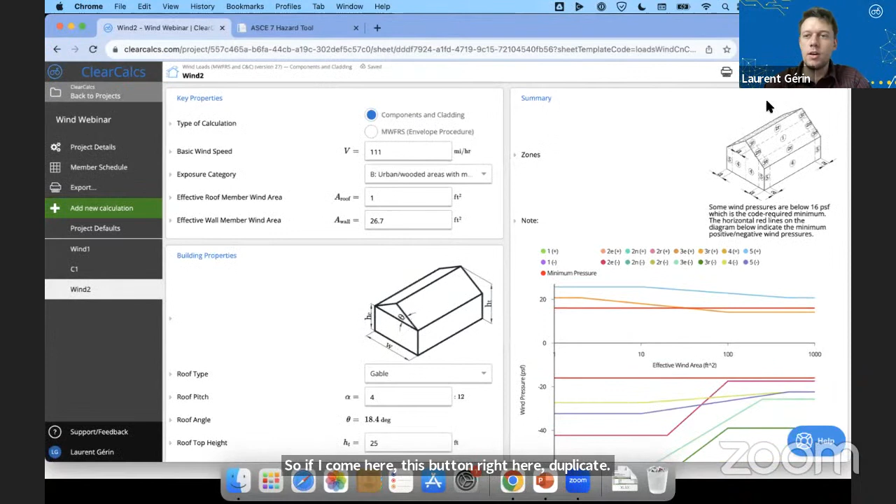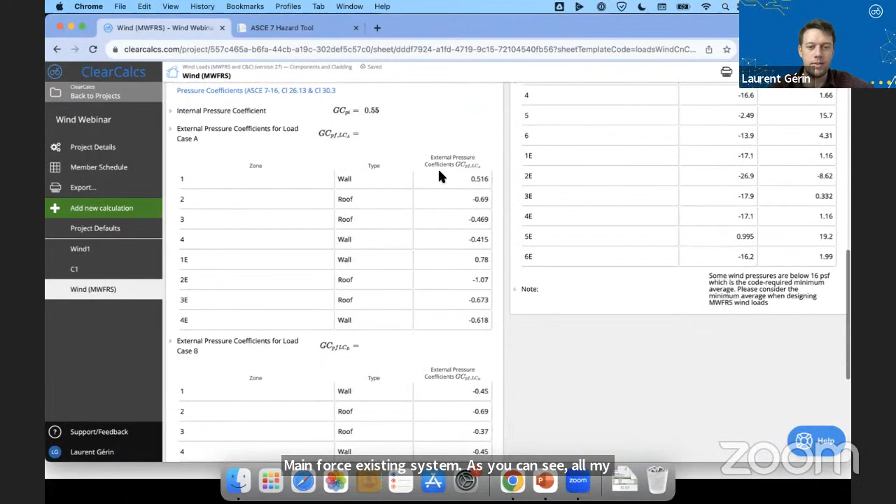And you can see all the same parameters are being used. Everything is good. Just to remember it, I'll name it main wind force resisting system, and that way I remember that this is it. And if I look at my type of calculation, I just have to switch now to main wind force resisting system. As you can see, all my parameters are still here. Everything is still the same. The only difference is these coefficients have changed and these values on the right have changed as well. So this is basically all we need to do to get the loads in PSF.

And what we'll be looking at now is we've got wind pressures for the case where we've got positive internal pressure. So that's when the wind is blowing air into the building and it's filling up with air like a balloon, and negative internal pressure, which is literally the opposite, where you've got wind being sucked out of the building and it's kind of imploding on itself.

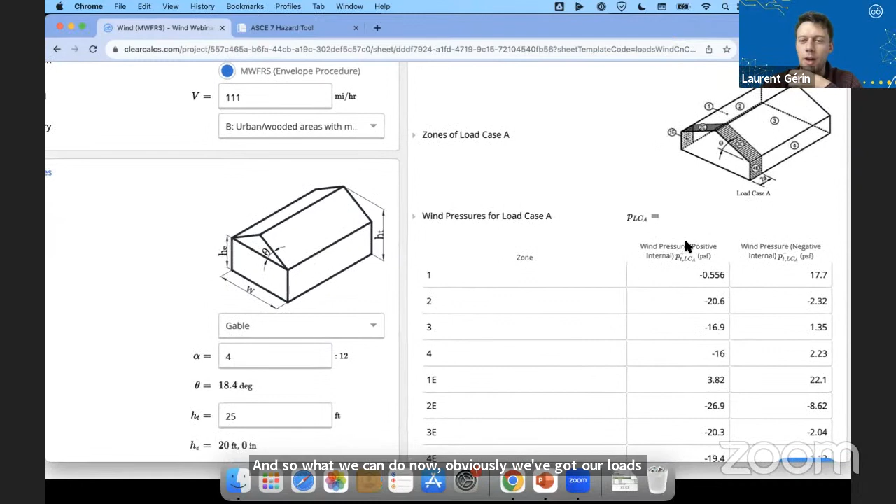And so what we can do now, obviously, we've got our loads in PSF. The natural question is, well, now that I've got my loads in PSF, how do I convert those into loads on my shear walls? And what we'll do is basically we've got these diagrams to help us. We've got two load cases, right? Load case A, which is typically going to be the wind loads being applied perpendicular to the ridge. And then we've got load case B, where we've got our loads being applied parallel to the ridge.

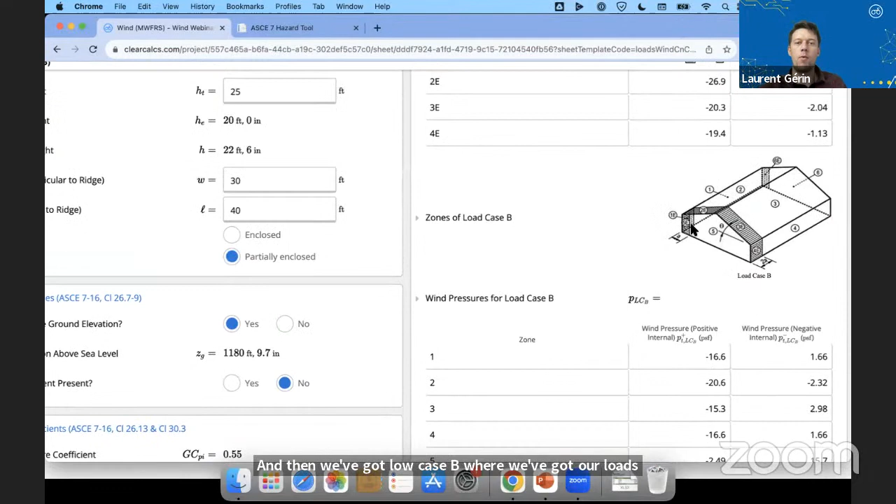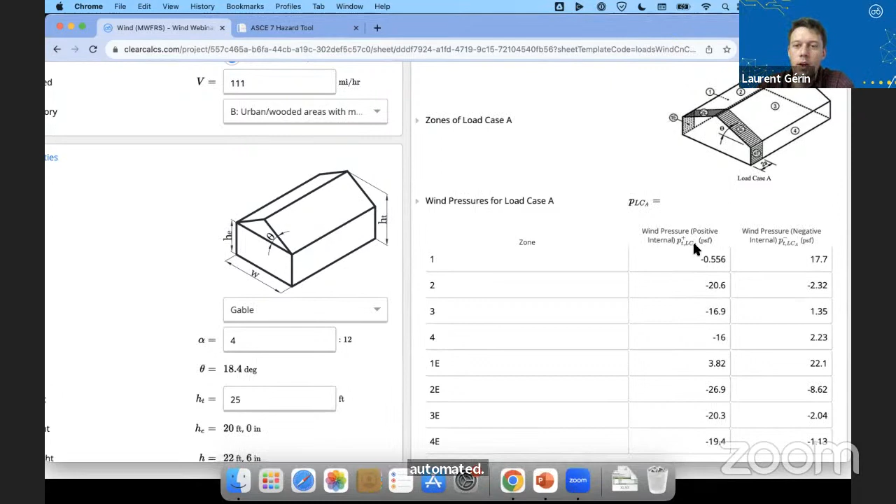If I wanted to look at load case A, what I would do is I could look at all these different zones and I could just sum up their loads. This is actually a feature that we're working on right now, and literally as I speak, we've got someone on our team programming this to be automated. But I would look at the positive internal pressure and the negative internal pressure, and I could literally just sum up these values, and I would take their horizontal components, especially for the roof, multiply them by their tributary width.

So say if I'm looking at zone 4, for instance, where I've got 16 pounds per square foot wind pressure being applied, I could multiply that by my zone 4. I know that my walls are 20 feet high and presumably half the load is going to the ground. So I would multiply this minus 16 PSF times 10 feet tributary width, and I would get 160 pounds per linear foot being applied to my building.

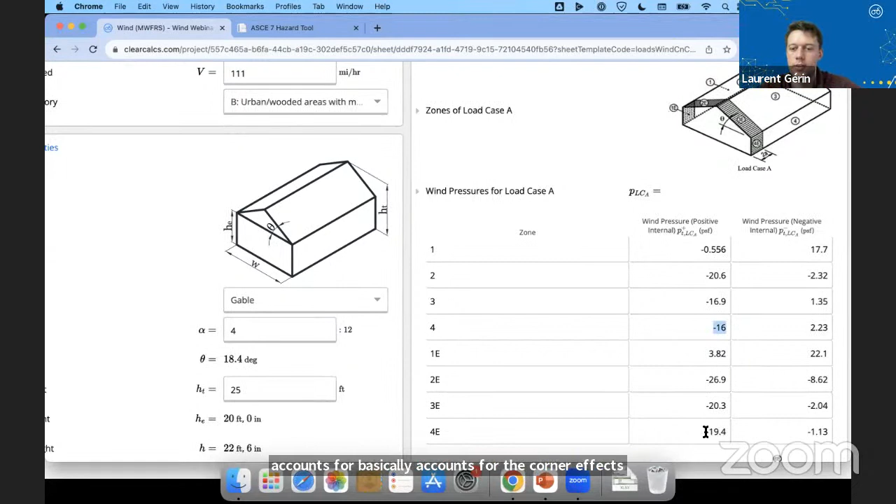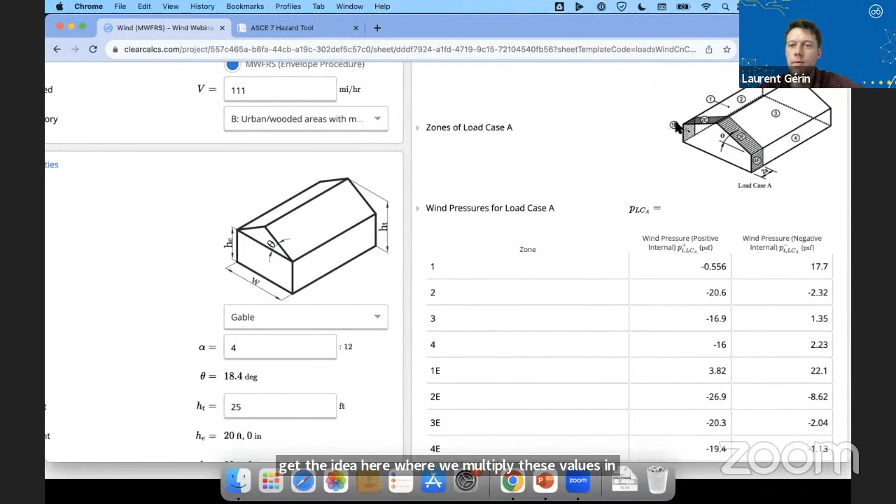Now I'd also want to look at my edge zone here, which basically accounts for the corner effects and a little bit of turbulence happening there. So I see I've got 19.4. Again, I would multiply that by my 10 feet, so I'd get 194. This is going to get a little hard to track, so I'm gonna stop here. But I think you can get the idea here where we multiply these values in PSF. At the same time, we do the same thing for zone 1, zone 1E. And then we just take the sum of these.

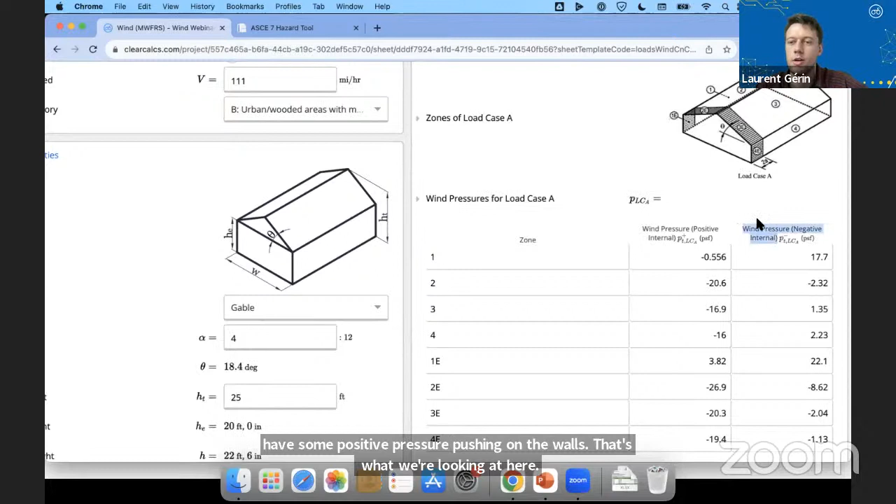So you can see we've got some negative symbols, some positive symbols. The idea here is that these all add up together. Some areas might have some suction. Some of them might have some positive pressure pushing on the walls. That's what we're looking at here. And then I would do the same thing for the case where I've got negative pressure into the building. And from that, I could get my loads in pounds per linear foot being applied to the building. And with those, I could then multiply them by the tributary width for my shear walls and put those loads into my shear walls.

So this is something that we're working on. The idea here is that basically you'll be able to just create a shear wall calculator, or it'll probably be something like a diaphragm calculator. You'll be able to just directly link these wind loads. We'll run the math for you, and then you'll just get your values that you can then link into a shear wall calculator.

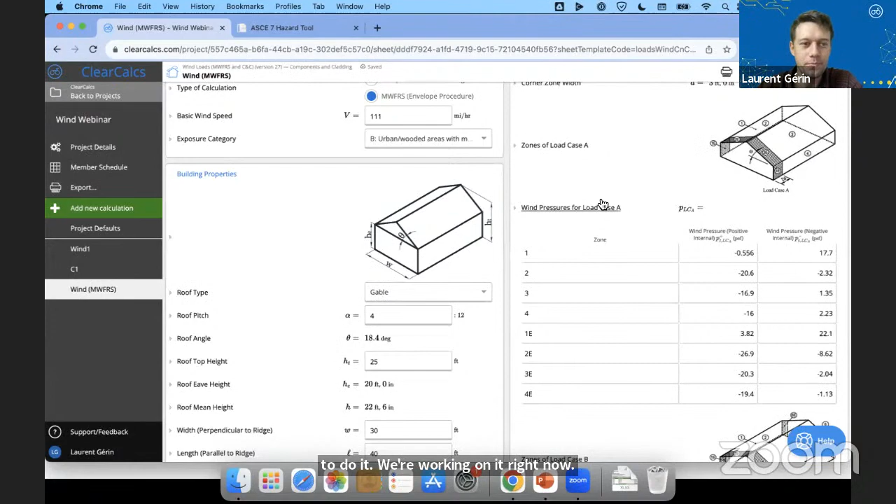Otherwise, I think I'm going to stop here. I'm going to go back to our presentation quickly and just conclude. Basically, obviously, wind loads are a very important thing to think about when you're designing buildings, including residential buildings. The most important thing to think about is the wind speed. Especially if you're near the coast, you want to make sure that you're using the wind speed specifically for where you are. But there's also other things to consider. Probably the most impactful one is topography.

If you're in an area with a lot of hills or you're building on top of a hill or something like that. There's two types of wind loads that we apply: components and cladding, and the main wind force resisting system. Components and cladding, obviously, for really local aspects, as big as a rafter usually. Then the main wind force resisting system, which is when you're thinking about shear walls, foundations, things like that.

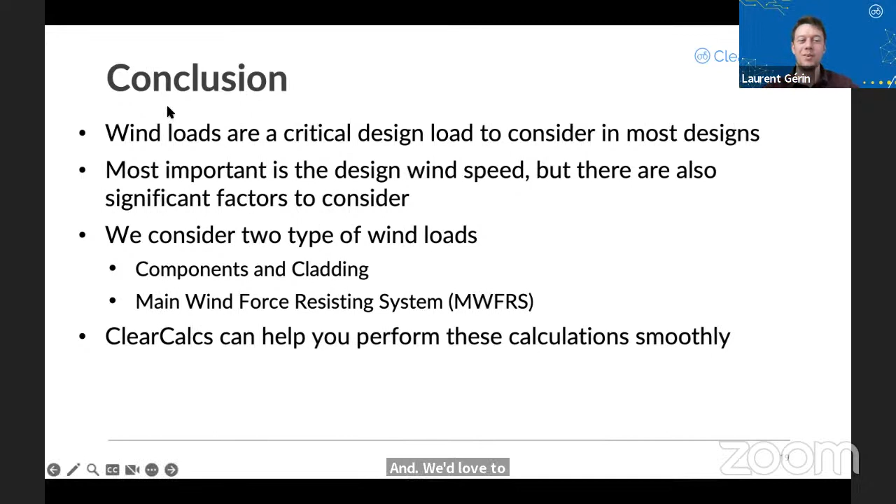And we'd love to hear more about what we can do to help you, especially with the wind loads.

Other things that are new at ClearCalcs: we just released, and this is something that we've heard from quite a few of you, custom wood properties. So if you're dealing with, say, very old wood that's got different design values, or some fancy European species or something, I'm making this stuff up, but if you're dealing with this, you can just enter these values now, and we'll still run the calculations per the NDS, so you'll still be up to code.

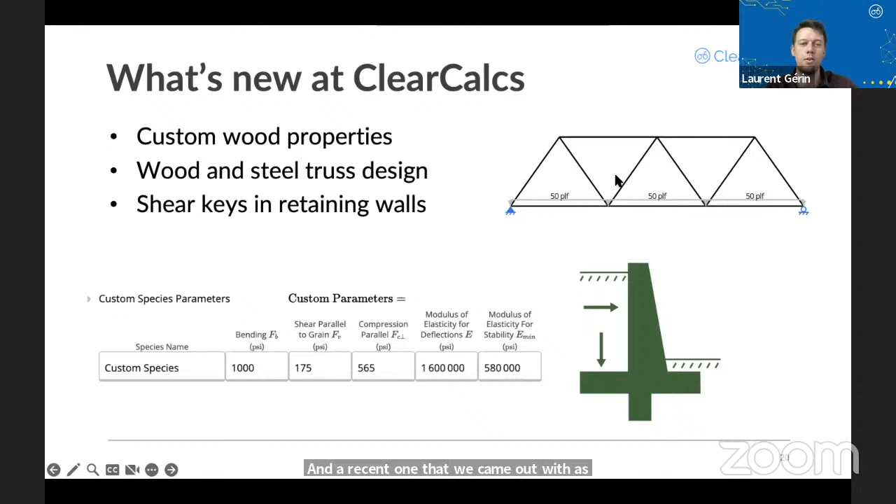We've also got, we ran a webinar on this last month, wood and steel truss design, fully supported in ClearCalcs. Love to hear how that's going. And a recent one that we came out with as well is shear keys in retaining walls, so if you're looking to improve your sliding resistance.

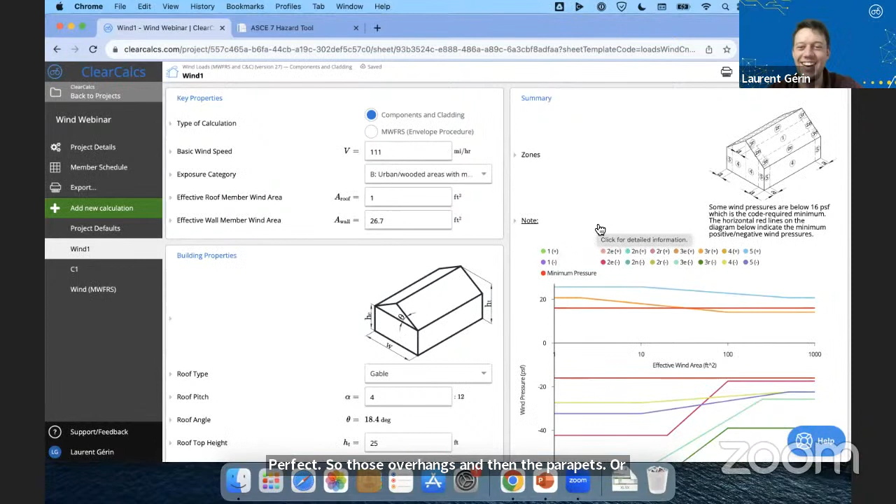Andrew, you nailed us on both. Love it, though. That's why we have these webinars. Well, not the only reason, but part of the reason, so that way we can get that direct feedback.

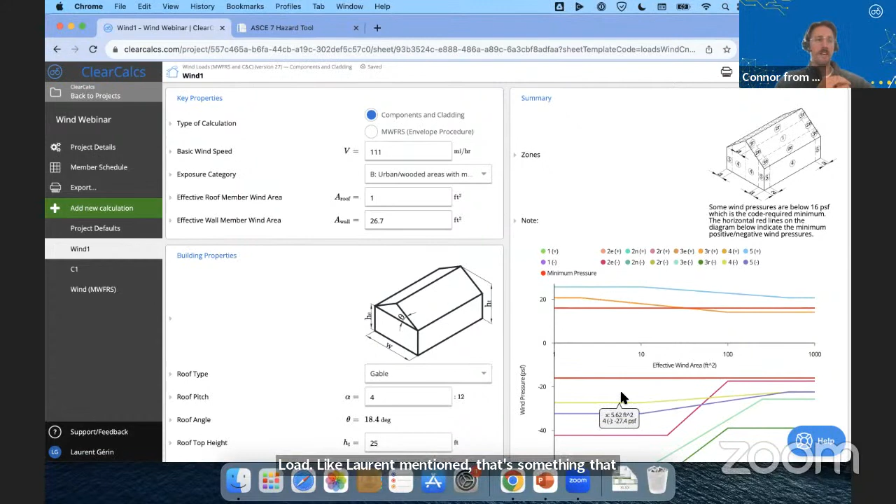Exactly. Thank you. Also want to note, Laurent really quickly ran through a how-to example in the last 5 minutes there, but a question I get a lot is, how do I take the PSF, the pounds per square foot loads from these calculators and implement it into, say, my shear wall calculator as a pound load? Like Laurent mentioned, that's something that we'll be able to automate pretty soon in ClearCalcs. I never ended the poll, so I'll end the poll now. Transferring wind loads to my buildings was, at 60%, the most annoying part of calculating wind loads.